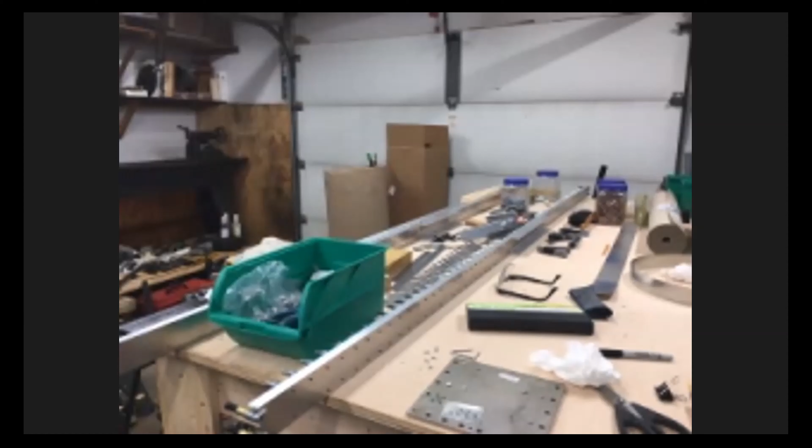But I was just kind of curious, how many of you guys have any of those pneumatic riveters, be it Harbor Freight or another company, and what's your experience been with them? You're talking about for pulling rivets? Yeah, for pulling. That red one in the lower left-hand corner. Yep. I'd have to look and see what brand mine is. I don't even remember. I bought it through Zenith.

If you don't mind asking, what was the price through Zenith? I was just going to go look. I don't remember. It was probably 10, 12 years ago when I was working on a 750. Well, it was probably half the price of what it is today then. Yeah. On Amazon they have a variety. There was one there for about $75 with 2,600 pound pull, it said. The recommendations on it, 5 stars or 4 stars, were pretty good.

Okay, so what is the go-to size or force needed? I've never done one of these. I don't know what the force is. That's a really good question, Alan. I guess I'm not sure what's required. So I use just a Harbor Freight one. I think the list price is like $40. You get your 20% off coupon and get it for $30 or something. Got like 2 of them on his bench.

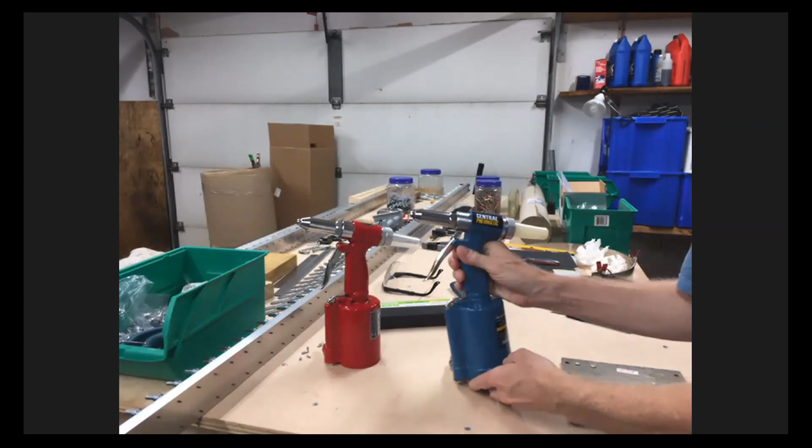I guess I haven't looked at the pressure. I know there's some adjustments you can make. With the actual air pressure, you can reduce it to get a different pull. And there's some other mechanical adjustments you can make. You can use a different size tip on it to get different effects. What I've looked at is the size on the back side of the pulled rivet where it expands, to make sure it's sufficient to hold.

Hey, Martin, have you used the rivets that are the recessed rivets that fold over? Are you talking about Zenith? Yeah, they use a conventional countersunk rivet. And then they have the concave tip that rolls over the edges of the countersunk to make it look kind of like a domed rivet, so it gives you a little more of a gripping or pinching. Compresses the 2 sheets together tighter.

Well, the head is also a little flatter, is it not? Yeah, not as much dome. It's supposed to be a little bit flatter than a conventional dome surface rivet. I just posted the link to that Zenith riveter in the chat. I believe the heads, instead of being flat, have a little bit of a convex dome to them, right? When they're pulled, they have the dome. Right. But it's a recessed rivet that they use.

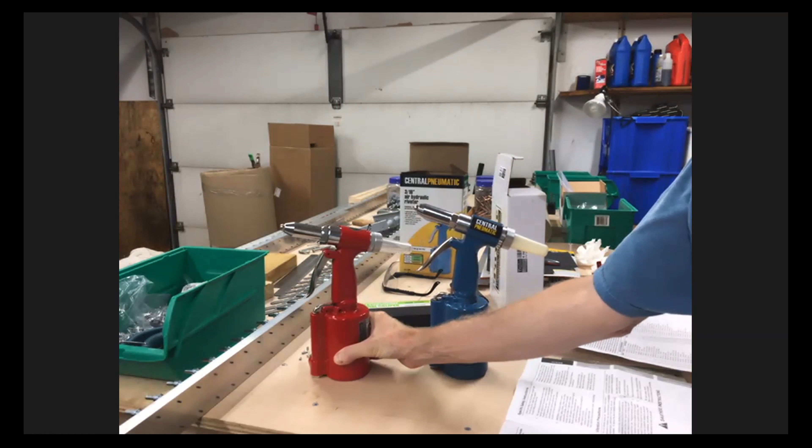Right. They start out with a flush countersunk rivet that you'd normally dimple the skin for, but instead of dimpling, you just use a normal rivet, and when you squeeze it, the tip on the rivet gun has a concave end, so it forms that flat countersunk head down to look like a low profile dome head. Interesting.

I didn't get to use it much on mine, but I helped them build the 1 Week Wonder, and 2 sets of wings at Oshkosh. So I pulled a lot of rivets on 3 different sets of wings in 2 years. Martin, so the idea is you've got something flatter than a conventional dome without having to go to dimples? Is that the concept? Yeah.

I never measured it to see the exact dimension. At the speeds the CHs fly, I don't think it's a real big deal whether it's flush or not. Van used to say that on the RVs, unless you're over 150 miles an hour, don't worry about countersinking. But some guys just like it because it looks nicer. It's a lot of work.

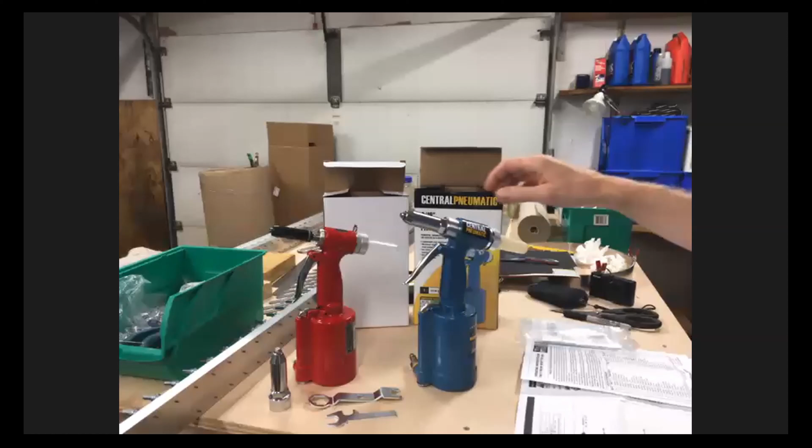Anyways, Greg, you got those two pullers there. Can you show us what the difference is between them? Basically the one is Central Pneumatic, so that's Harbor Freight, a $30, $40 tool. Yep, right there. And then the red one is Aircraft Tool Supply? It is Aircraft Tool Supply. It's branded Taylor Pneumatic Tool Company. And this is the one that Dave Thatcher has on the recommended tool list, and it's made in the USA.

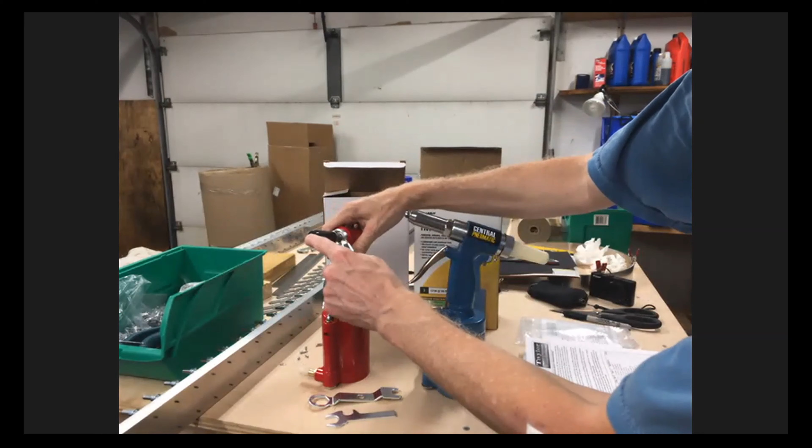And the basic gist of the difference, I would say, is, for example, I've removed this nose piece off this one. Both of them in the instructions will say always disconnect tool from air source before disassembling. That's just a given. With this, it comes off nice and it works fine. All of these surfaces are almost like nicely polished, finished surfaces. On this one, I'm not going to take it off right now because I am going to mess it up. When you turn the Harbor Freight one, it comes off with significant friction. This just comes off spring-loaded but with smoothness to it.

What I found happening was where you gauge the pull length, and it's very specific in the manual, it says 71 millimeters, there's this gauge wrench for both of them. It's on the money. Now, with this one I would take it off, and this distance was out to here. And then I would readjust it and it would move. The only thing I can attribute it to is the finish of the parts inside of this one is more like a first pass cut and then assembled. I'm sure you could take Scotch-Brite to the internal parts and make it as good as this one. But this was driving me nuts.

I had to change the nose piece, and oh my goodness, that took serious oomph and friction and almost grinding on it. So the trick with the Harbor Freight one was actually hook it up to air, squeeze the trigger and hold it. So now it's pulling back and there's no pressure against these parts. Now change the nose, change this thing. And when it's off, you can let go of it and it comes back out. Then you can do the equivalent of this on this one and get it adjusted right.

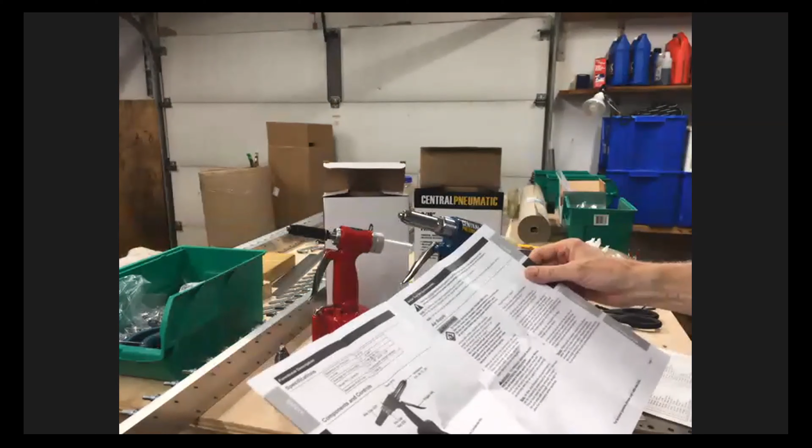But that was the gist of it. In the operating instructions, it's a little bit confusing about how you remove the bottom and the oil that you have to fill it with. In the Harbor Freight instructions, oh, and by the way, it says maximum pull force 2,800 pounds at 90 psi. And that's probably just a function of the area versus, you know, and pressure that's on it.

But it talks about, on this one, it says fill, you know, you remove this cap, you pull the piston out, and it says fill it to the top of housing 15, which is this part right here. In this one, it basically says a ½ inch below nut 40. Well, nut 40 comes in through here and attaches this part on. So that maybe cleared that up a little bit.

The instructions for this one were really specific about using a 30 weight non-detergent oil. And this just said hydraulic fluid. And so it kind of left it sort of up in the air. So that's the gist of the difference between the two.

$32 with a coupon, and good gravy. This thing was $165.95 with shipping. I paid $180 for that thing, which didn't feel right. But the second I used it for the first time, it was like, oh yes, this is awesome. So that's the gist of it.

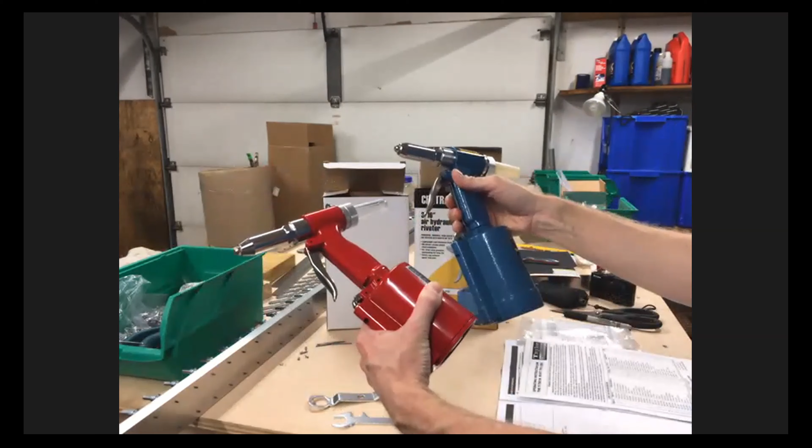Very cool. Well, there's a difference in size and weight also, isn't there? What's that? There's a difference in size and weight of those two units. Actually, it's very similar. Yeah, I don't know. It's hard to discern a difference in weight.

And what's almost scary is the similarity between the two. You know, it's almost one of those situations where the parts all came down the same assembly line. These just got put together. These got shipped off to the US and got polished and put together. You know, the angle of the pull trigger is a little bit greater here than here.

So I mean, there's definitely a difference to the internal mechanism, but... Which one's more comfortable? Oh, this one is the beast. I mean, it's incredible. But you know, as far as holding it, it's really just not that much different. But the fit and finish of this thing is outrageous. And like I said, not that you couldn't take it all apart and do that with this.

One thing I was going to say, Greg, you might want to look at this. Yeah. I have a swivel fitting, pretty inexpensive, but man, does that make life easy. Hey, I was wondering about that because I did have one of those that I put on here. Okay, yeah. So I've had those as well. Those work great for some tools, like spray guns and stuff.

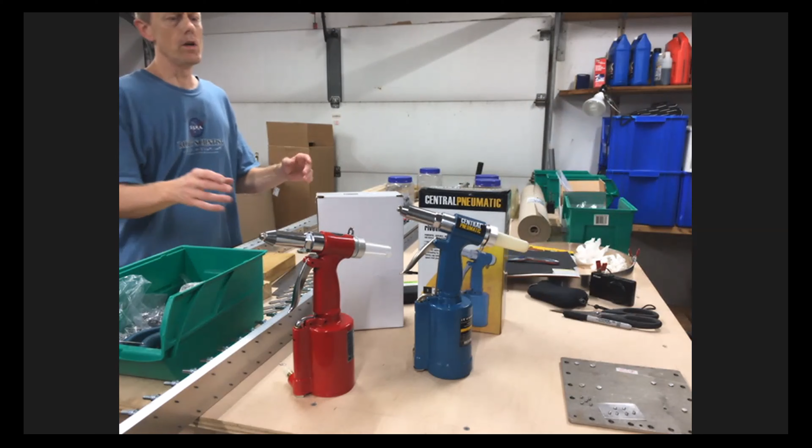That brings up an interesting quick side issue. A few weeks ago we were talking about the countersunk rivet angle, the 100 versus the 120. And with the Zenith one, they're using a countersunk rivet and then with that head, they press it down, because of that shape of the head. So here we were talking about a 20-degree difference in countersink angle, and Zenith intentionally uses one that's 60 degrees off.

It just kind of reminded me of that conversation, the 120 versus 100 thing, which, I've got the cutters for both now, but it's really interesting how they're using something that's 60 degrees off and then forming it. And here we were talking about a difference of 20 degrees. It's just kind of interesting. Zenith AVEX is using the 120-degree rivet.

Right, and so that's what Greg's saying. On each side, it would be 60 degrees from flat, right? No, it's 30 degrees. It's 120 included. Oh, is it 120? Okay, I guess that makes sense. Yeah, you're right, 30 on each side. You're going from 180 to 120, so it's a 60-degree difference. Depends where you measure the angle. Yeah, or a 5-degree difference, or 10, whatever. Right.

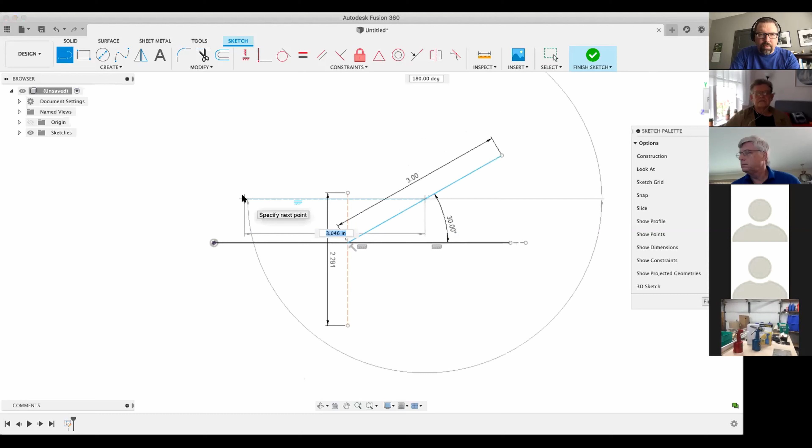So what we're talking about would be, let's just put up. So this is your surface. Let me blow away that dimension, and we are putting a rivet through it at a 90-degree angle. So this would be in theory the center line of our rivet, right? So from that point, there'd be a 30-degree angle there. Now let's just pick this up and pull it across. I'm not making this too scientific, but

in theory, if this is the head of your countersunk rivet, this would be a 120-degree rivet, right, Martin? Correct. So this line is 180 degrees from the center point, and this would be 30 degrees off of 180, which would give us 150 degrees, and then the other half would be up another. Pulling this the wrong way. Just mirror it. Yep. I guess I could have just mirrored it, but basically, if we dimension this angle, you're now at 120. We'll just over constrain that. Does that make sense? Yeah.

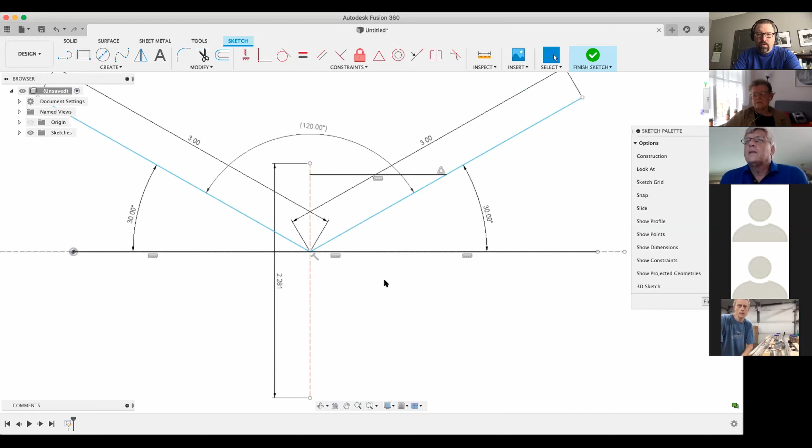Versus if we do this to this, well, I guess I can't even dimension a single line. So the thing we were talking about a couple weeks ago was how the rivets that are called out are 120-degree rivets, but the hole is 100-degree. Do I have that backwards? Maybe. Yeah, an AD rivet countersunk is different than what your pulled rivet head is. So if you use a dimple die that's set up for a normal MS or AD solid rivet, it's not the same angle. Right.

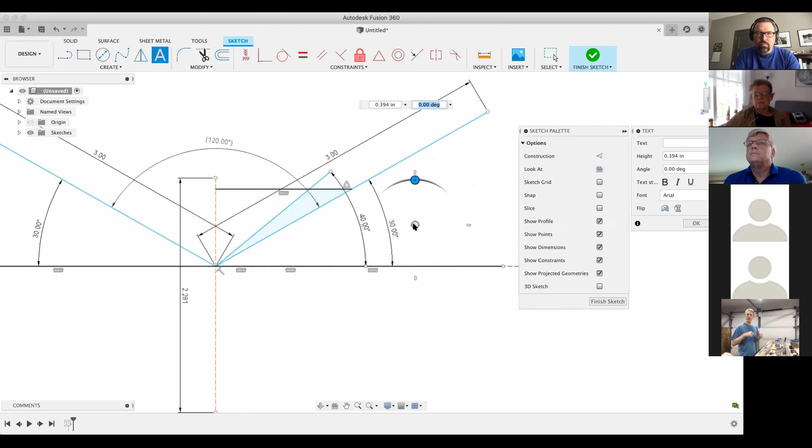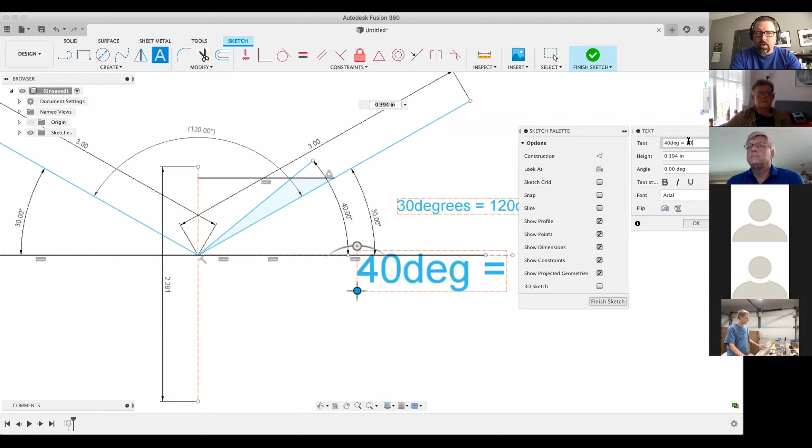So the cutter that comes with the standard countersink was 100 degrees instead of the 120 degrees of the countersink of the pull rivets. That was the initial thing that I had asked about. You got to get a 120-degree countersink to use them. Yeah, so then we have the example of the Zenith rivet that is intentionally way further off than that, and they just mush it down and make it work. And here we're worried about this little angle. It was just such an inconsistency. That was the only observation. Right. And then the thought here being 40 degree equals 100 degree rivet, right? Or 100 degree hole, I guess, as the case may be.

So the thought was that if you're dimpling with a 120 degree dimple die, but you're putting a 100 degree rivet in there, is your head going to be wide enough because of the angle there and that sort of thing? Right. Or if it's reversed, of course, then maybe your head's too wide and it will actually not be flush. And then the most important part is simply, what... Go ahead, Mark.

Most guys end up doing is they inadvertently use the 100-degree dimpler dies and stuff for their skins, and then they put a 120-degree pulled rivet in there. So then the head of the rivet is actually touching on the perimeter of the hole. It would overlap right in this area, right? Yeah, it's not seating down in. Bottom line, they're not compatible. Correct. You're not getting the same contact that you would normally get.

So if you really want to countersink and have a nice smooth surface and pull rivets, get the 120-degree dimple dies. Or at least make sure that the rivets you're using match the dimple that you're using, right? That's what we need to watch for. So the reason this came up was, Greg, you were looking at the builder's manual, and you found that the tool list listed the 100-degree dimple but 120-degree rivet, or vice versa. And so there's some confusion around that.

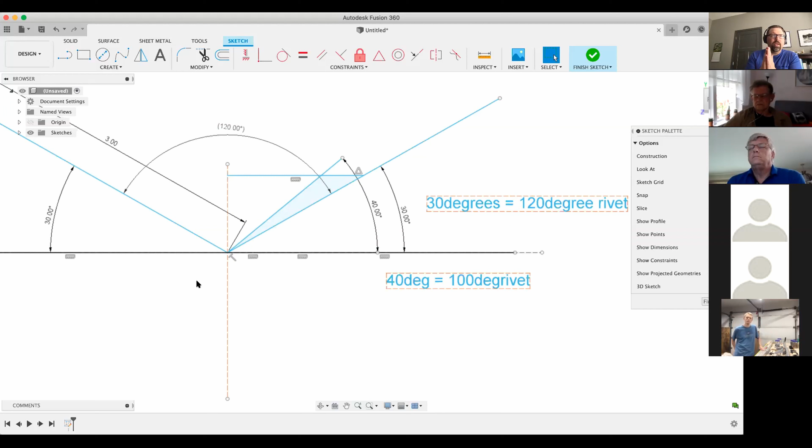Well, the only place that I'm aware of that the flush rivets are used on the Thatchers is in the tail area. There's a bulkhead where the vertical stabilizer attaches, right? So there's some uprights. So there's rivets on both sides, and if you have a rivet that's sticking out, those two surfaces aren't going to sit flush. They're going to be separated by however high the rivet head is.

Yeah, and you'll see some comments out there about the pulled flush rivets not truly being flush. So that's where I was thinking we were pulling a Zenith with putting this rivet into that countersink to reform that head, to make sure that bulkhead would fit up flat. That was just a question. I do have now both 100 degree and 120 degree countersink cutters and pull rivet dimple dies, so I can put whatever angle wherever. But that initial question was still there.

Gotcha. I'm going to pull up that spot on the plans in a sec. Solid rivets eliminate the problem. There you go. I use them wherever I can, just because it's me. That's all right, you can do what you want. It's experimental, right? I might save a whole half a pound by the time the plane's done.

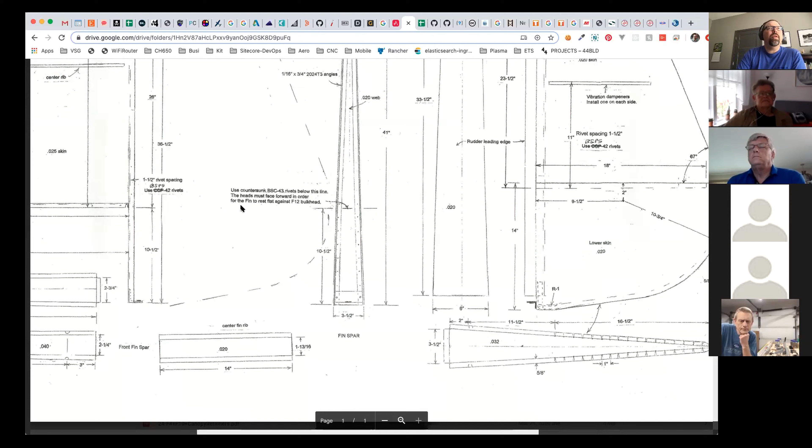Let me share this here. So this is the piece here. Use countersunk BSC 43 rivets below this line. The heads must face forward in order for the fin to rest flat against F12 bulkhead. So this piece is this right here. Let me scroll up and zoom out a little so we can see what we're looking at. So this is the vertical stabilizer spar.

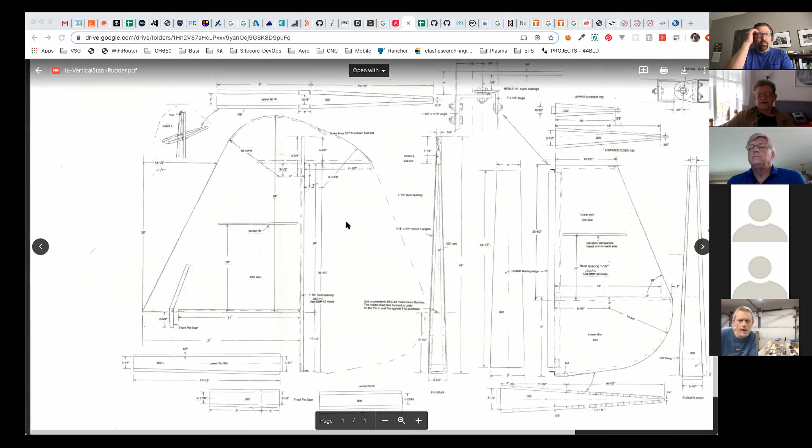I'm still seeing your rivet drawing. Oh, do a refresh. It should be the blueprint. You got it? Yes. Okay. So anyways, that's the piece we're talking about.

When you mount this up, it needs to mount directly to that F12 bulkhead in the tail section. Let's go look at that quick. So this would be this bulkhead right here, which is actually marked as F11. I'm guessing the F12 numbering is probably from the CX5, not the 7. I'm looking at 7 plans. Let's go to the 5 and double check that that's correct.

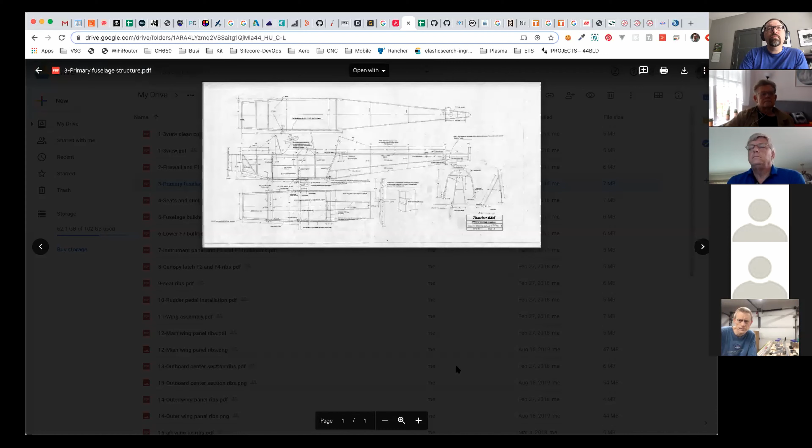Wait for this to refresh. Yeah, so this is marked as the F12 on the CX5 plans. So on the CX7, it's the F11. So it's a change. Ellen, you asked about what changes for the CX7. That's one of them.

I don't think that was me. What's that? Oh, wasn't it? Oh no, I'm sorry. That was another builder asking. I think Don Larson was asking about that. So, yeah, Don's building a 7. What's that? Don's building a 7. Yep, exactly. Okay.

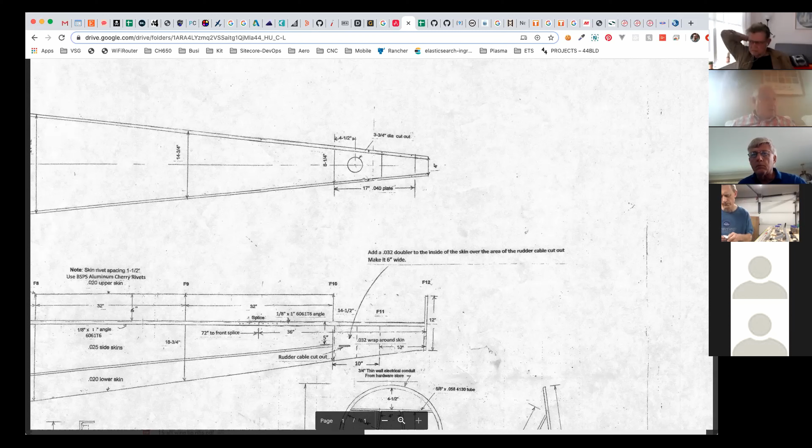Bulkhead. This is ironic because I've actually been closer to a CX7 than anyone else online because I sat in the prototype. Yeah, there's a few. Greg, didn't you go down and sit in that one? Yeah, we went down in November. Oh, okay. And then I think Jeff up in Minnesota, I can't think of his last name right now. Yeah, Jeff. There's proof of him sitting in it, there's photos online. I don't have proof. No dated photographs. There you go. But a couple of people have been down and checked it out. I personally have not, I just decided to build one. But cool. So, anyways, that's that bit.

Let's see. I'm gonna stop my share and go dig up that YouTube video of the CX4 crash that we had. Thank goodness everything's good there, but can someone summarize the circumstances? Actually, let me read this to you, and I'll put the link in the chat as well. This seems to be the most up to date and has a quote from the pilot. I'll just read the beginning of it.

It was a harrowing plane crash captured on video, and now the pilot who survived it recalls the frightening ordeal. David Reeser spoke to Eyewitness News about the moment the small plane he was piloting crashed while attempting to land at an airport in Upland Wednesday afternoon. Reeser faced two major problems. The propeller of the plane flew off, and oil suddenly covered his windshield, forcing him to fly blind. Quote, it was a real surprise when the propeller went off. It came off the airplane, but I didn't have a sudden fear, he said. I've always practiced off-field landings or dead stick landings. Now I get to do one. Quote, Mayday, Mayday, I just lost my propeller. There's oil all over the screen, end quote, Reeser says in released audio tapes.

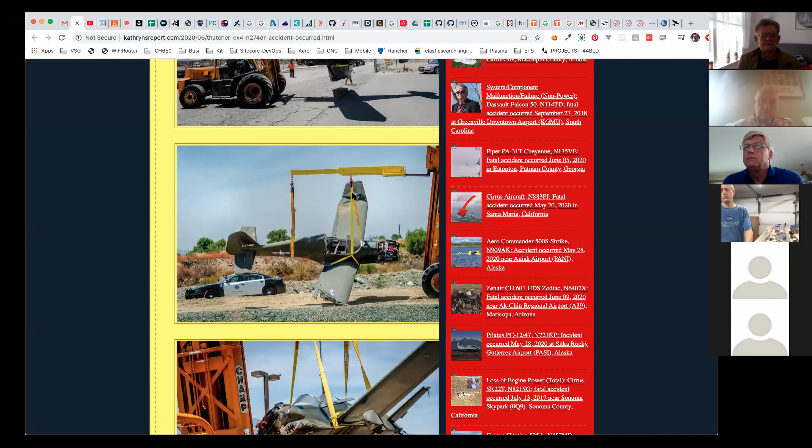So what I'm inferring from this is, if you were to hit severe turbulence or some in-flight issue, it looks like the wings aren't going to be the problem area of the airframe, right? Like you aren't going to lose a wingtip in flight probably. That is a pretty rough crash, it looked like. So definitely stressed the airframe in ways that it wasn't intended to be stressed. Hey, Ben. Look at the speed brake on the bottom. Let's see. Yep, it's there. It looks a little twisted there.

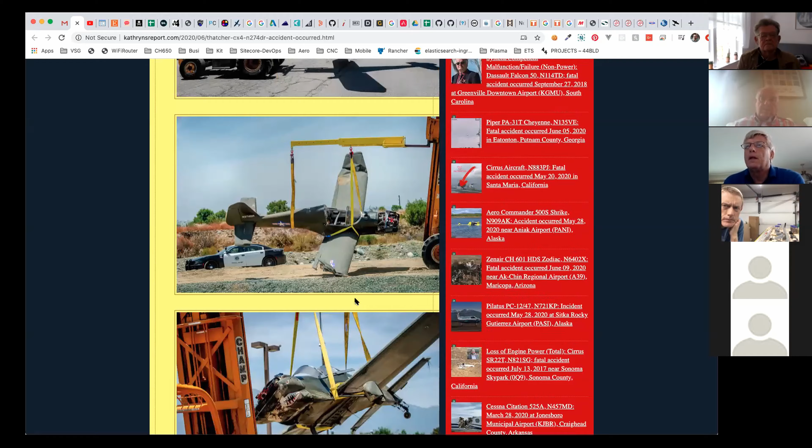Ben, if you get a chance, go to your email. You got a picture of both twins. All right. Let's see here. A picture of both what? It's called both twins. The two planes are identical. They built them together. Oh, okay. All right. Let me see what I can come up with here.

Because other than RevMaster and Scott, nobody else is actually building engines. Sonex and Great Plains are just kits now. Right. Most of them are not 2400s, are they? No. I don't even know if Great Plains even offers a 2400 anymore. In the documentation, it stated that it was a VW 2400. Right. The FAA documentation.

But yeah, Martin, to your point on the engine build, I think you're right. I don't think there's another VW-based builder. Nothing that I can think of anyways. Because there's AeroVee, which is the Sonex. There's Great Plains, but both of those are kits, right? Yep. Correct. And then the Revmaster and the Casler, you buy it complete. I think that's it for the VW base.

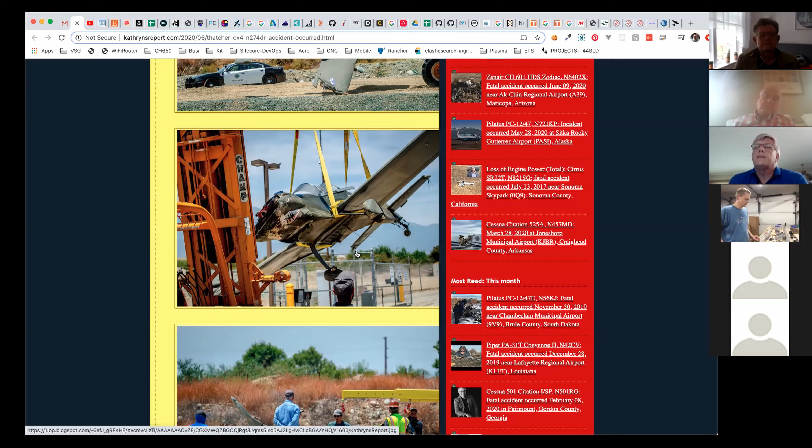Yeah, I can't tell though on this if the speed brake was down, or even if it was down, based on all the inertia that was put into it, if it might have been popped up. It looks kind of twisted in this photo, but it definitely looks up there. Looks like the landing gear's twisted too. Yeah, this one's pretty bad.

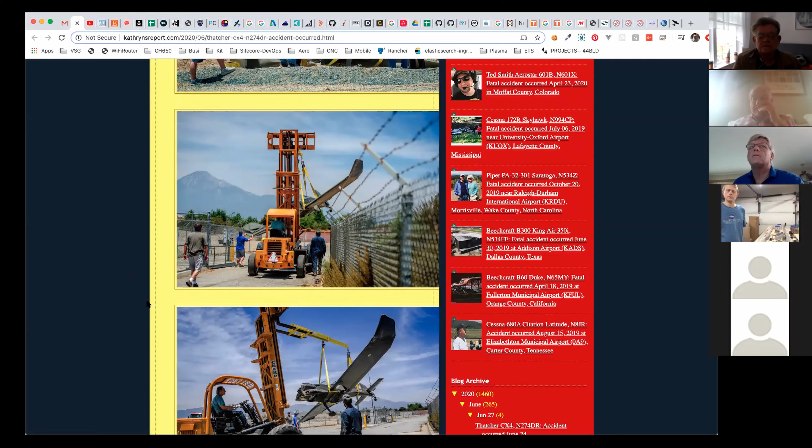I guess the things I think about are like the cockpit area isn't collapsed or compressed, which means that there's a good amount of strength in there. I think the design's good to protect the pilot in the case of something like this. I don't know, makes me feel pretty good about the design there. I'd be more worried about what happened to the fuel when I was sitting in the cockpit and couldn't get out.

That's a good point. So something did change with the geometry of it because he wasn't able to get out, right? So was that due to injury or is that due to something having moved? Yeah, it'd be interesting to find out if the plane just ended up in an attitude that it was hard to get out.

Because we had a guy 20 years ago landed a Yankee in a tree, and he sat in a tree all night because he figured if he got out of the airplane, he was probably going to hurt himself more than if he just sat in the tree. And finally they rescued him. So sometimes you get hurt more after the crash than during the crash. Yeah. At least in the tree, you'd be able to use a cell phone. Yeah.

Are you on the ground? No, but almost. I'll be there eventually.

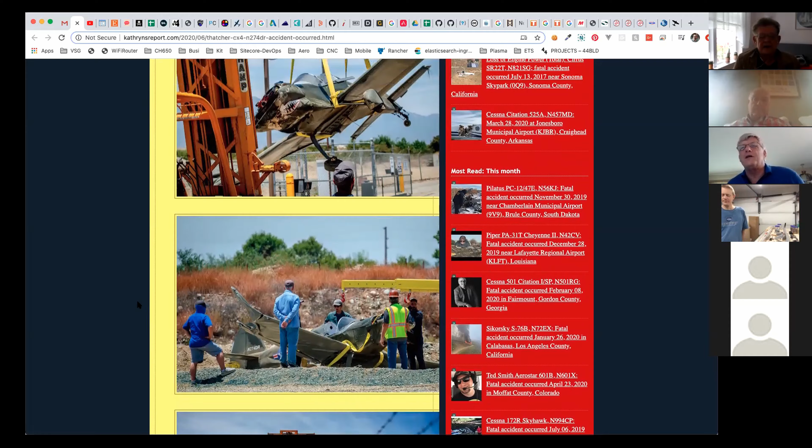Well, luckily the tree was beside a highway, and somebody driving by the next morning saw him up in the tree. Wow. But that's what you get when you scud run at night in the wintertime. Anyways, kind of an interesting topic there.

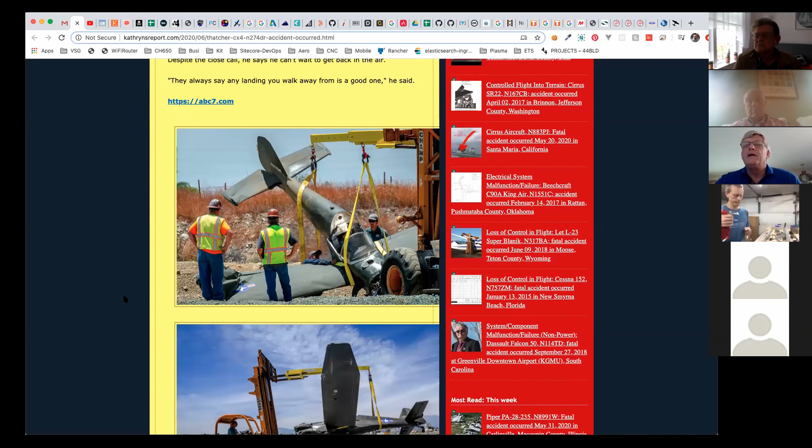With more information, it'd be interesting. As Glenn keeps saying, the planes have like a 13:1 glide ratio; well, without the prop, it should have been even a better glide ratio. So how high and how far from the airport did it happen? And I know Glenn asked, was this on takeoff? That's the question too. Like, how long is the runway? If he was on takeoff roll and he got up a couple hundred feet and then lost the prop, that would make sense that he'd already have used up half or 3/4 of the runway. Something on climb out.

Yeah, I don't know anything about the Upland airport there. I mean, the only thing I could think of is, how much can you side slip it? Because he had a visibility problem, so you might end up with a face full of oil if you side slipped it too much, I suppose.

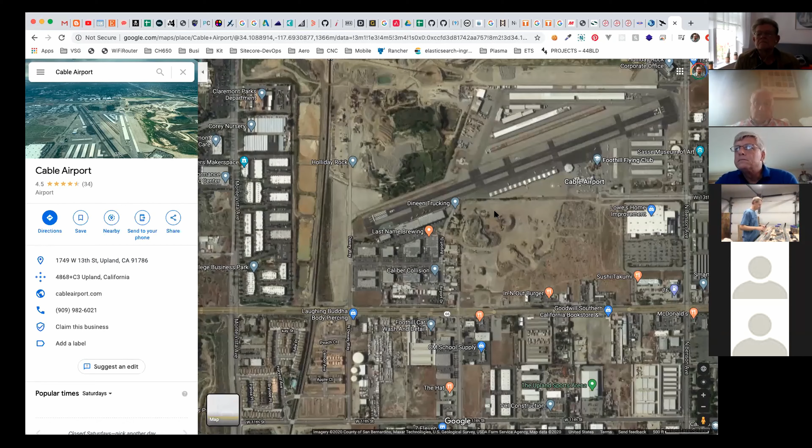So I believe the photo I saw showed that he was going this direction and ended up somewhere down here, like where it says College Business Park. So he was kind of going to the south. I don't know if he was taking off or landing or what he was doing, but he was heading towards the southwest, and the initial attempt at landing was somewhere in here, I think, and then he ended up passing this

road here, Dewey Way, and then landing somewhere here. This must be that berm. Oh, there's a channel down here, and then a business park. Yeah. So that must have been what he was trying to avoid there.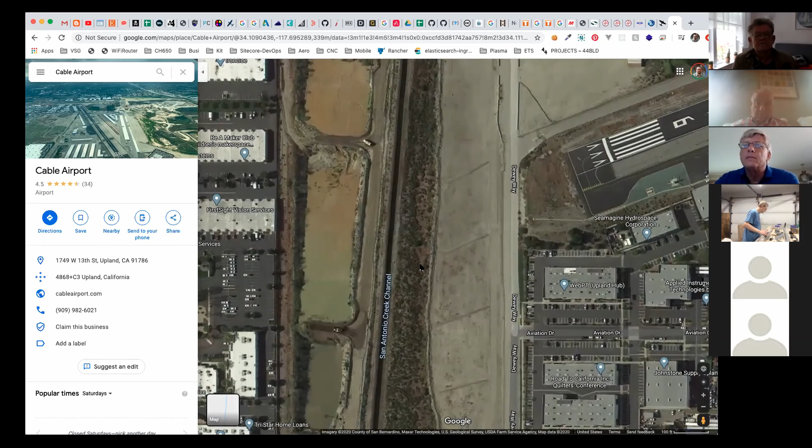But that water, are those ponds? It kind of looks like it. Now, whether they have water in them year round or not, I don't know. Maybe dry ponds. Yeah, they do look like ponds though, and it does say San Antonio Creek Channel, so that would maybe be a dry riverbed or something, but seasonal moisture in there, I don't know. But anyways, that's what I saw.

Not to say it wasn't over this way or something, but there was a diagram showing the point where the plane came to rest was down here, is what I saw. So it seems to kind of jive with what we saw in the video.

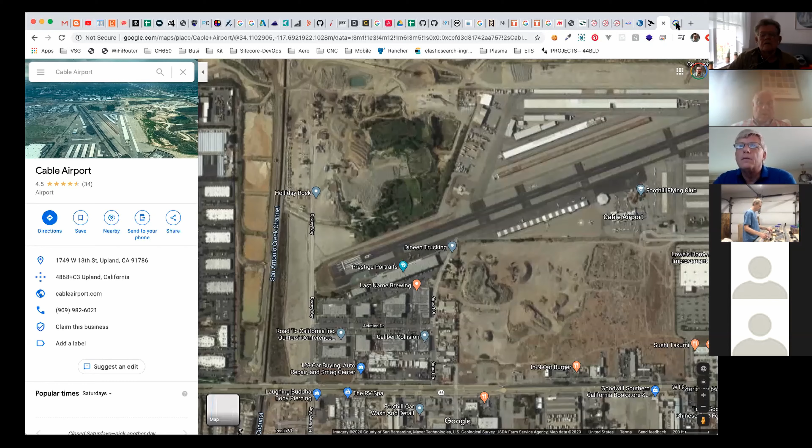But is that a towered airport or not? I didn't look. Looks like the tower, I do not know, just north of the Dineen Trucking. It's not a very big airport, but they might have enough volume to have a tower. Let's see. Okay. Do we have any AWOS?

Fuel pricing. Hello? Hello. Hello? Harold, you're on. I'm sorry. Somebody's trying to call through. Oh, okay, no worries.

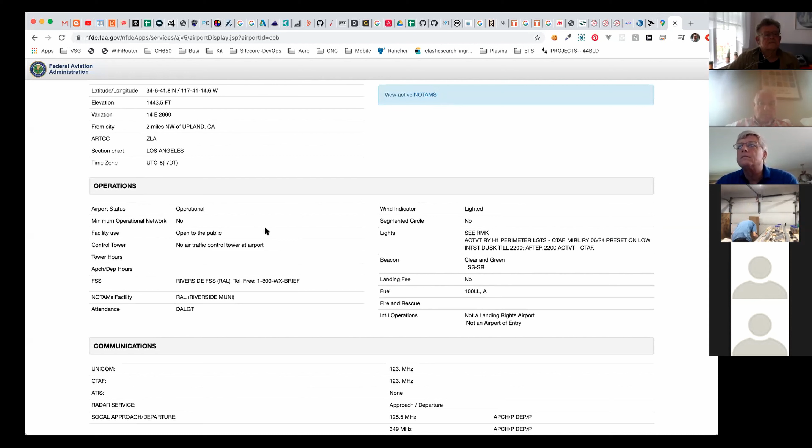So what else? What else are you guys up to? Alan's getting ready to start building, and there's a couple other people that are starting CX4s and other things. Anyone have any new projects they're working on? Greg, what's your status? I saw some riveted together aluminum there, so.

Yeah, there's one other thing I wanted to mention. A couple places, probably in all the CX plans, you end up with 3/4 angle that you need to rivet into. And boy, can you see the little mark on the end of this thing right there? Yeah. Okay, that's essentially how close you can get with a rivet head down on that. And it's kind of silly close to the edge of the angle where you'd normally want to be riveting further in.

So I ended up making a little block out of aluminum actually, and shaping that so that you can now get that rivet head on there and be doing a little more justice to exactly where you want to be riveting it. So this little block that I made was a real saver in that regard, because it made possible what really didn't look like it was possible. So that was the only little tidbit.

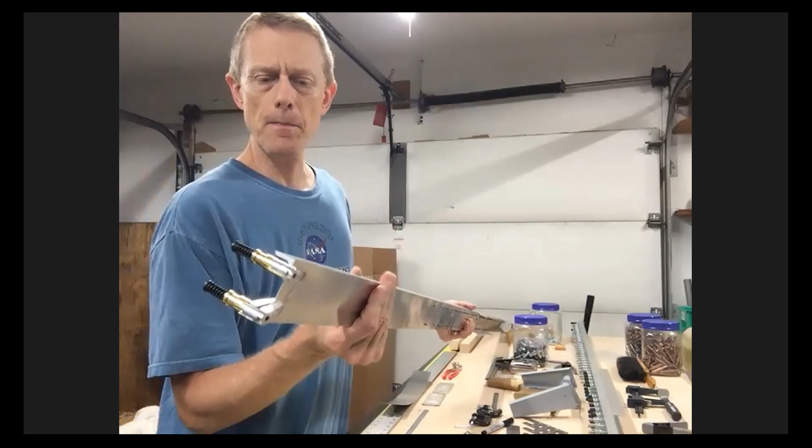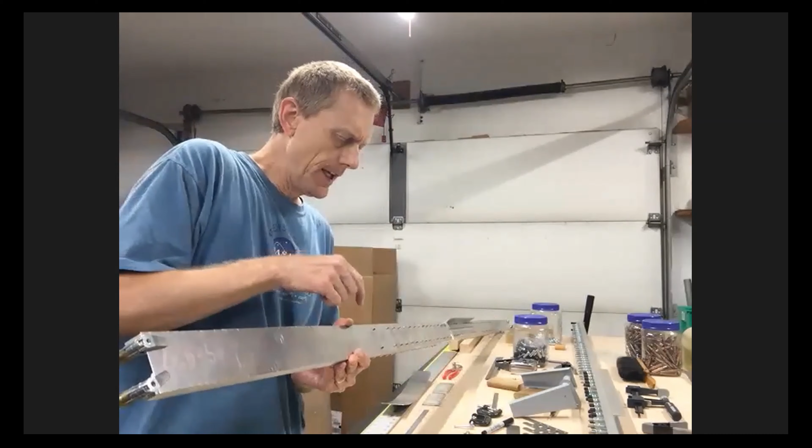So in the construction manual, you see photos of these horizontal stabilizer spars with the full height aluminum and the pulled part of the rivet on this thinner back side, which of course, yes, it's preferred supposedly to put the rivet head against the thinner material. So in theory, you'd be going back the other way. Right.

Now, when you do this with the 3/4 angle, if you have the spar web inside of it, now this is 2 1/4, so it's out of proportion, but you end up with a significantly smaller piece of material going in on the inside. And so I chose, because of the thicker angle, to mimic the photos that were in the construction manual, and in lieu of trimming it down a good bit more to fit on the inside, to put it like they have in the photos on the back side, if my little quick visualization made sense.

What is the reason that you're riveting the other way? Right. What is the reason that you're pulling them from inside versus outside? That's what I'm missing. Because that's exactly the way the photos in the construction manual show it. I think it's wrong. I would agree. I mean, unless there's a specific reason, but that seems wrong to me. Well, when you put in S1 and the two S3s, there's a real question as to how you can access that area.

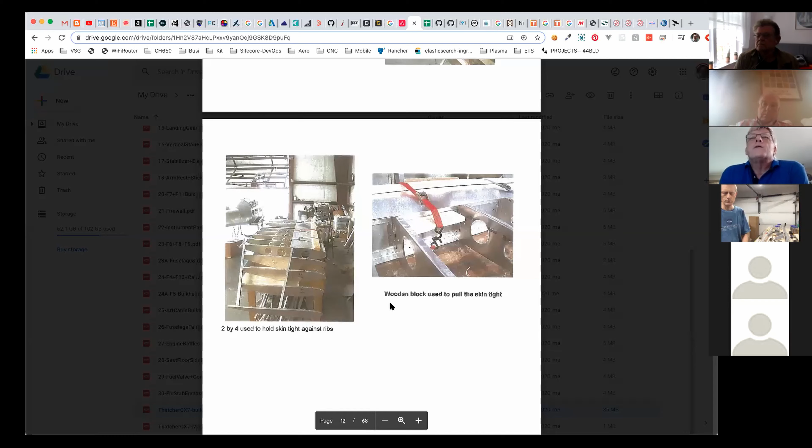Say, a quick question, Ben. I'm on your shared screen on like an internet page for the last 10 minutes, so I missed all that, and I cannot find any way to get off of it. Is there some way to? Oh, it's up above in green. It says you are viewing Ben's screen, but it's not what you guys have been talking about.

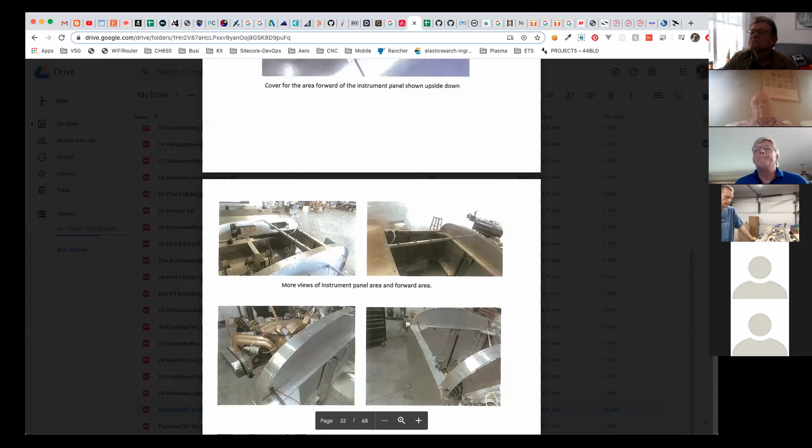Apologies. Yeah, I'm not sure. Other than if you disconnect your video or something, or let me try just stopping and resharing here again. Although I've done that a couple of times. And let's just see if that clears it all. Is that any better or still the same thing? Yeah, nothing. I'm not certain. Let's see. Trying to find the spot.

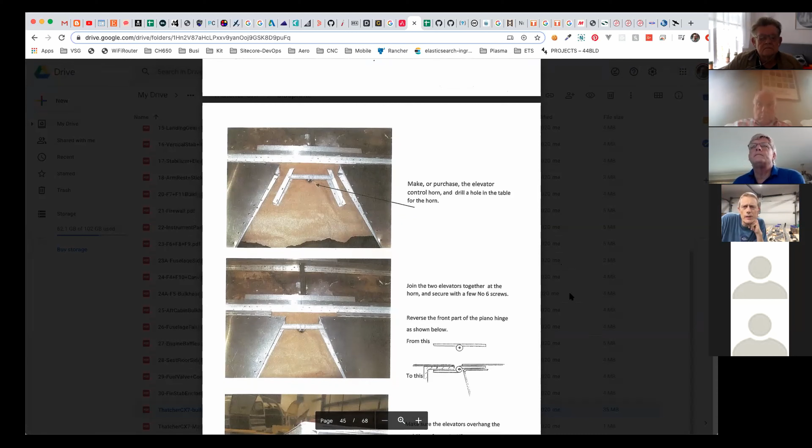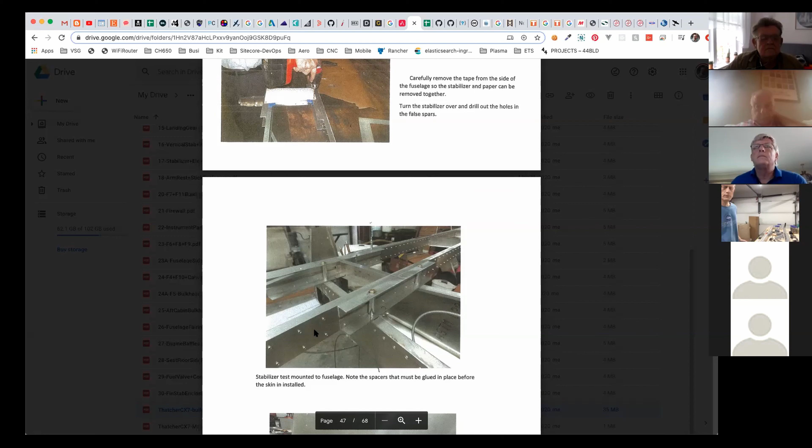Okay, so Greg, this is kind of the general area we're looking at. Is this what you're looking at here? Yeah, it's that, and then there's a couple other. Right there. Wow, yeah, that's weird, huh? That's exactly what I'm set up to do, exactly like it's shown in that photo. I mean, if there's not interference on the backside from some other joining component, I can't understand why you would do it that way. Is there a description of that? Yeah, here's another one. I can't tell if this is the formed head or not. Some you can't tell, admittedly.

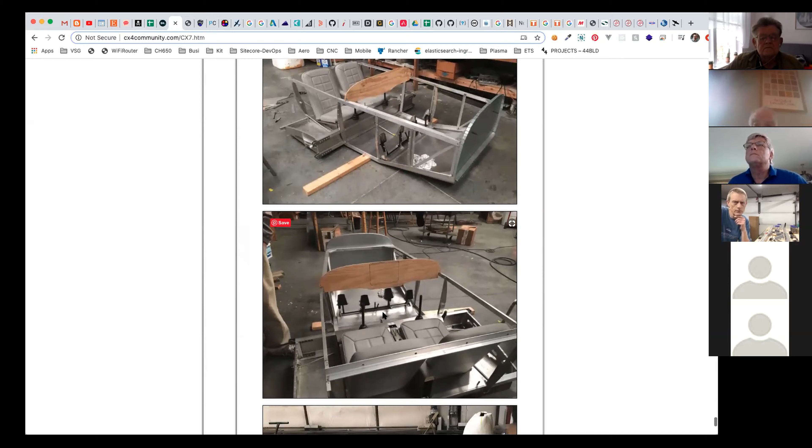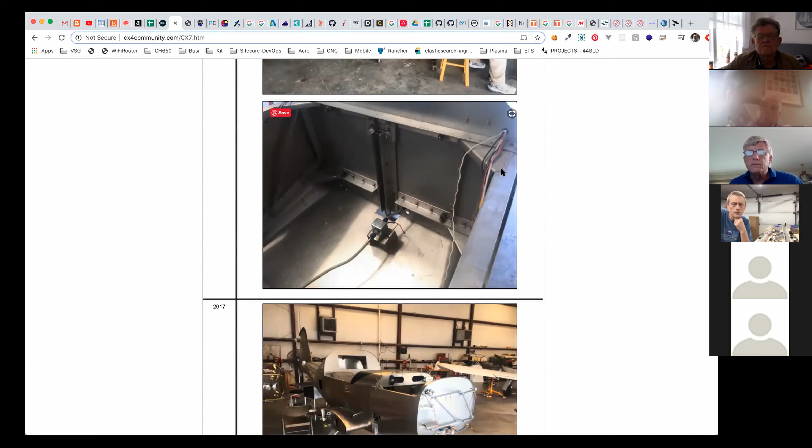Okay, I'm going to go over to this. So this is on the CX4 community site. These are photos I think Jeff took. Let's scan through and see if we can see any close-ups of the tail section. See, like here, this is what I would expect. These are those brace pieces, and they're riveted through the thinner 40 thousandths material into the 3/16ths piece. Same thing as the skins here and so on. Exactly. That's what you would expect. Yep.

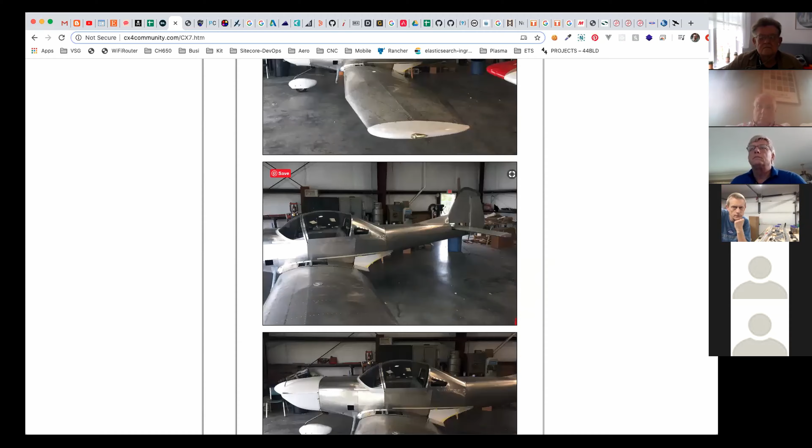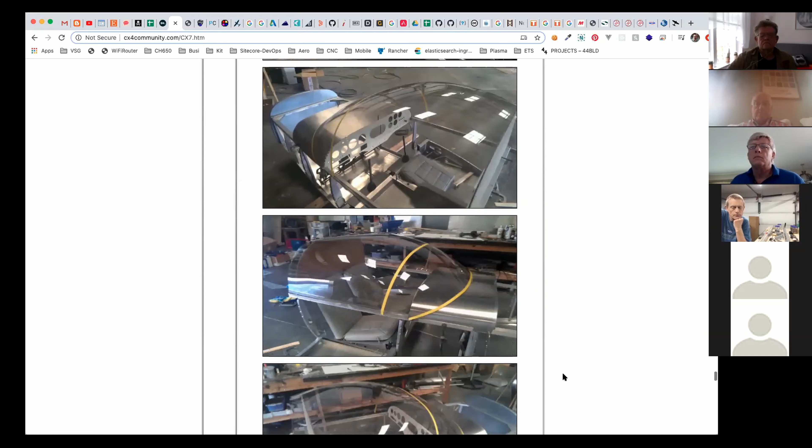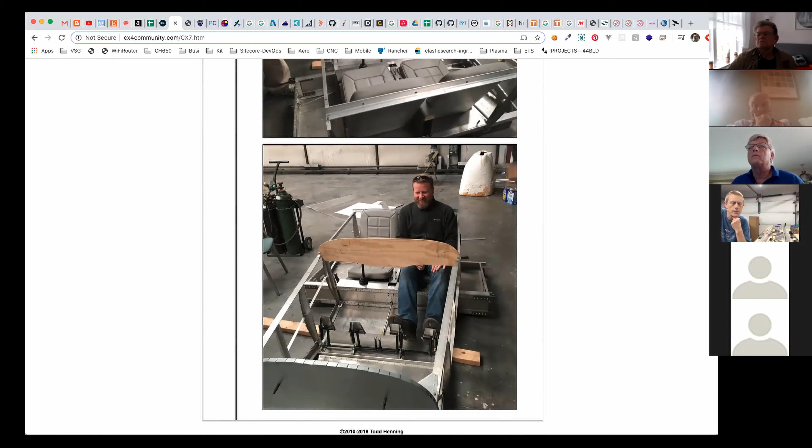And I would look long and hard, or talk to Dave for the reason that he did it that way, as shown in the builder's manual, before I would do it that way. It just seems contrary to everything I've ever seen about doing pulled rivets. Yeah, I'm honestly not seeing anything in here. You can keep scrolling down slowly, but I don't think there's much on the tail here. And you have some situations where the S1 and S3 ribs attach between the two horizontal stabilizer spars, and you've got thin material on both sides. So it's just whether the head goes on the thinner side, because they both are.

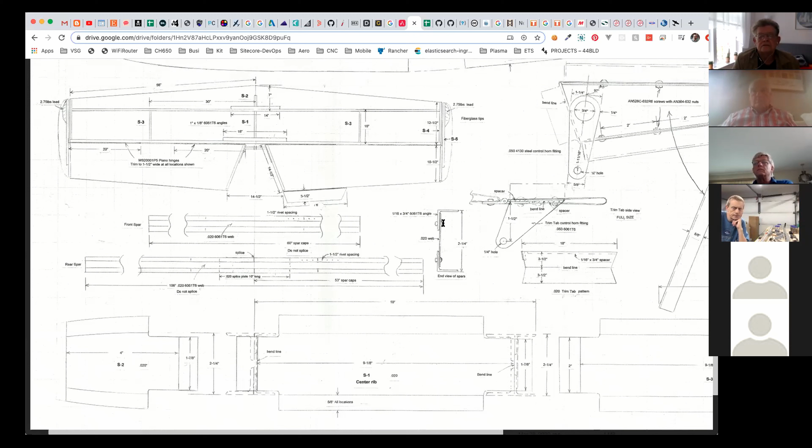So in this case, on the blueprint I have on the screen, the factory head would be external to the airplane. It would be inside, I mean, it wouldn't be in the airstream, but it would be pointing outdoors. Yeah, exactly. Looks to me that would be an ideal place to put a flush rivet and solid ANs. Solid, I would agree. I think flush wouldn't be necessary. It's not in the airstream, so it shouldn't have any effect on it either way. But yeah, the solid rivet, that would be totally fine there.

Question about the orientation of the piece. I'm thinking in terms of, did Dave build it the way he built it as if those rivets were bolts and you were running bolts from forward to aft? Or have I got that backwards? Well, it's shown in the blueprint here. Yeah, okay, so I see what you're saying, because with bolts you would always want the head of the bolt to be facing forward as much as possible in any structural components. Yeah, so I think in this case the factory head would be facing aft.

So the open end of, let's see if I'm getting this right. The open end of this faces, there's two angles. I can't see myself on the screen here, so I don't know if you guys can see my picture, but I think I have Greg's video pinned here. Why is the web built on the inside of those angles? I don't know. The only thought I would have would be that for some reason he wanted that splice plate on the backside to be flush on the angle, but I don't know why it would matter if it was on the web or not.

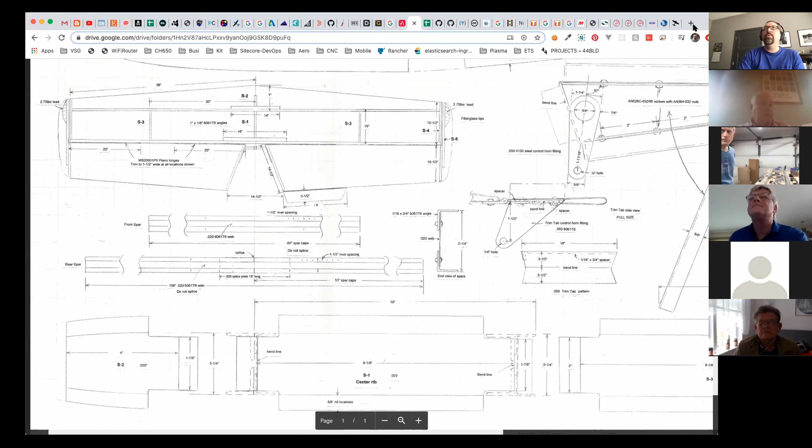Let's see, pull rivet. I'm trying to think. Is it 519? There's a spec on hole spacing, edge distance, that sort of thing. But I'm not sure if this is for pulled or not. Actually, what we're trying to do here is derive the reason after the fact, which is probably a waste of all of our time. Very true. Call Dave and solve that question.

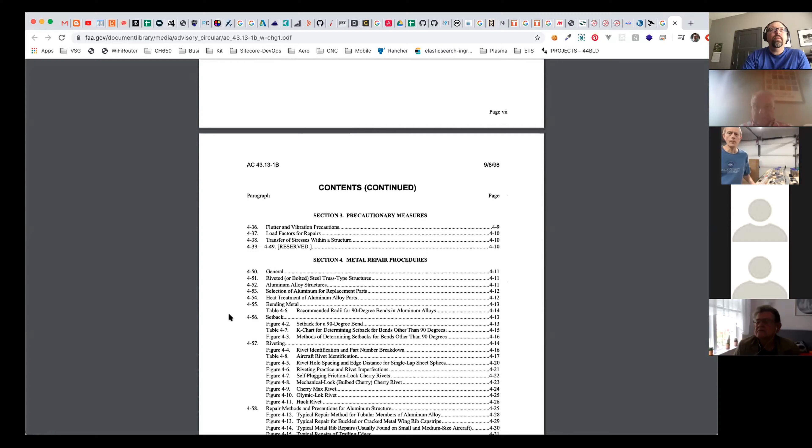Greg, are you going to reach out to Dave on that one? Yeah, I did touch base initially, but now at this point I need to clarify. But yeah, that's the plan. And honestly, I'm asking more than I'm telling. So Greg, after you have that conversation, would you post that in the groups? Absolutely. Thank you, sir.

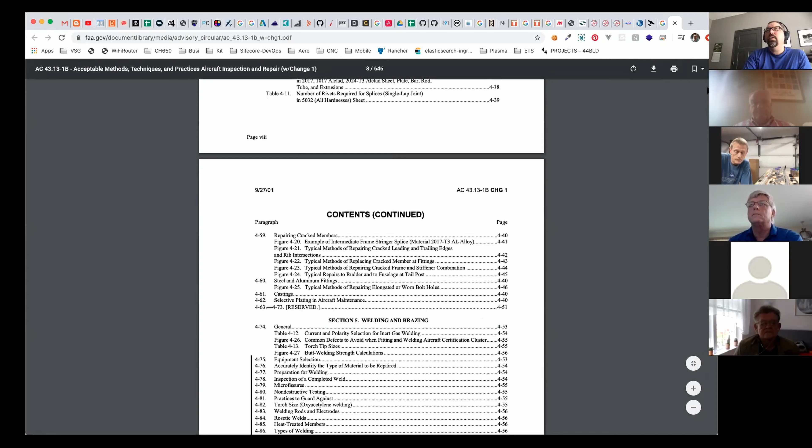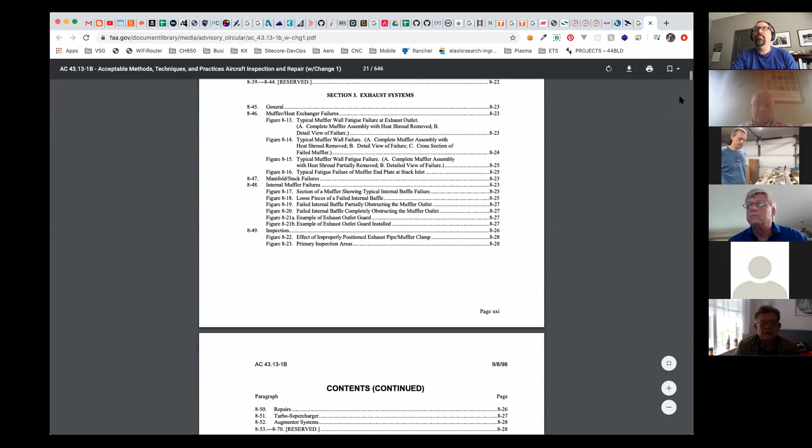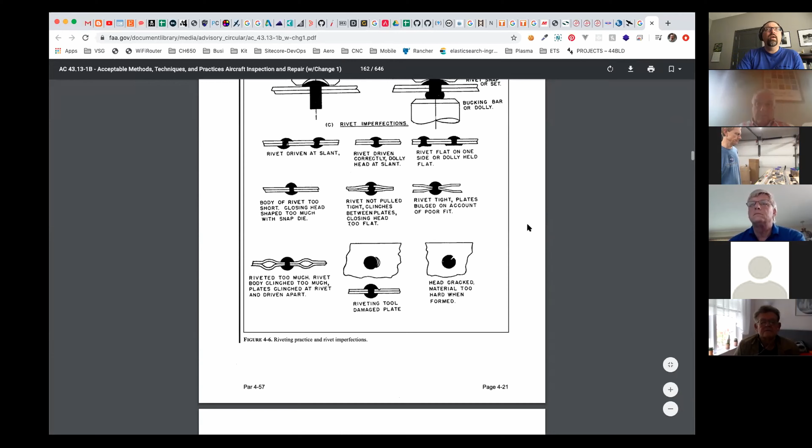So anyways, this is a good place to go. This isn't letting me scroll down for some reason, but here we go. Follow the Bible. This is a good place to go for details, 425 or something. There's 420, rivet identification. This talks about the diameter of the rivet, the spacing of holes. This is for hard rivets. Maybe that part doesn't. There you go.

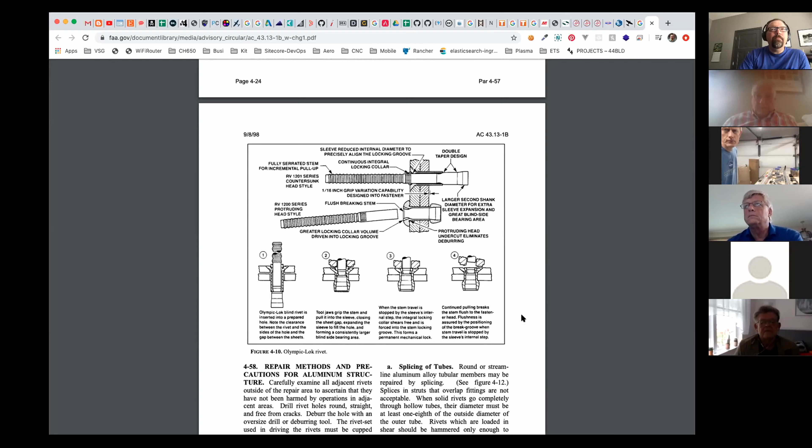Here it talks about Cherry Max rivets, self-plugging friction lock, bulb, Cherry rivets. This doesn't discuss orientation. Yeah, that's what I was going to see, if there was anything that talked about which way. No, this document doesn't.

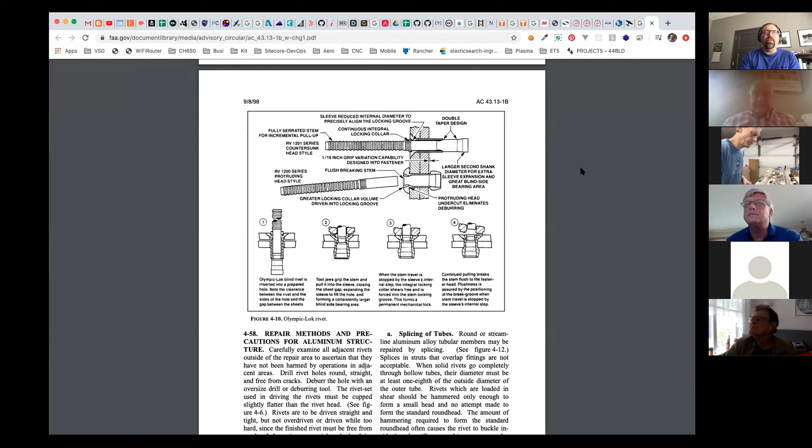There was a separate document that talked about orientation of fasteners. I can't remember which one it was offhand. Oh, sure. I guess what I was looking at was, well, I guess no. You're probably right, Alan. What I was specifically looking for is riveting different thickness material together, and which the orientation. Okay. So to your point, that might be in a different document. It seems like I had seen it in here before, but maybe not. There's a lot of pages and a lot of information, so it could be hidden in here somewhere. Anyways, but yeah, this is a good resource.

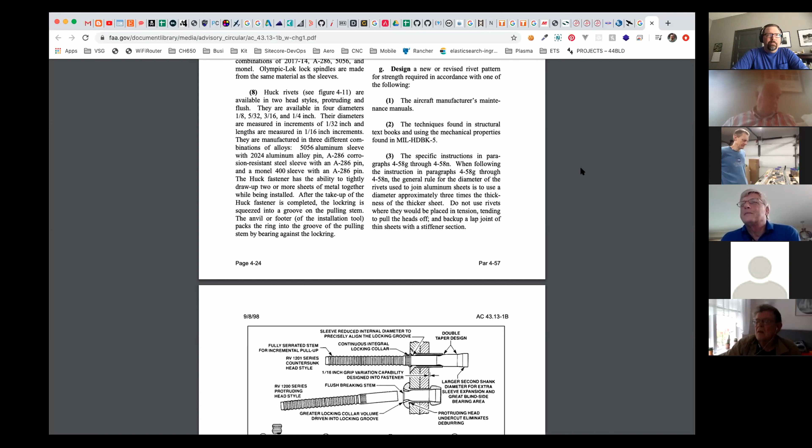It's great bedtime reading when you can't get to sleep. But when all else fails, consult Tony Bingelis. Yeah, right. That's actually a really good resource too. Yeah. Yep. But anyways, well, cool.

Anyone else have any other interesting thoughts, comments, questions? Any update on the CX7? Nothing since the last that we heard from Glenn. So sounds like the taxi testing went okay, and that's about all I've heard. I try not to pester him, so, but hopefully it'll be soon.

And my CX7, I've been working on redoing the center section spar. There were dimension issues we hit, and so I started machining that anyways. So hopefully I'll have that together before too terribly long. Are you redoing it in the virtual world or actually physically making a new one? Both, yeah. So I redid it in CAD, and now I'm machining it. I've cut the web and the two flat bars, and now I need to get out my jig for the angle and do that. But yeah, here I'll share my. I think I shared this last week, but I'll share this anyways.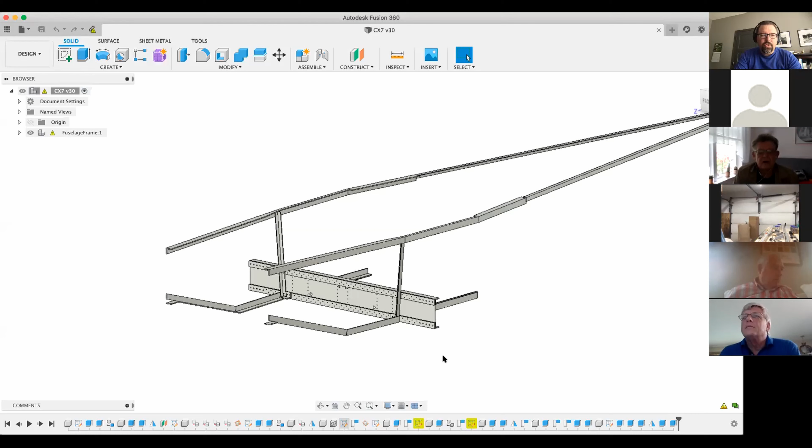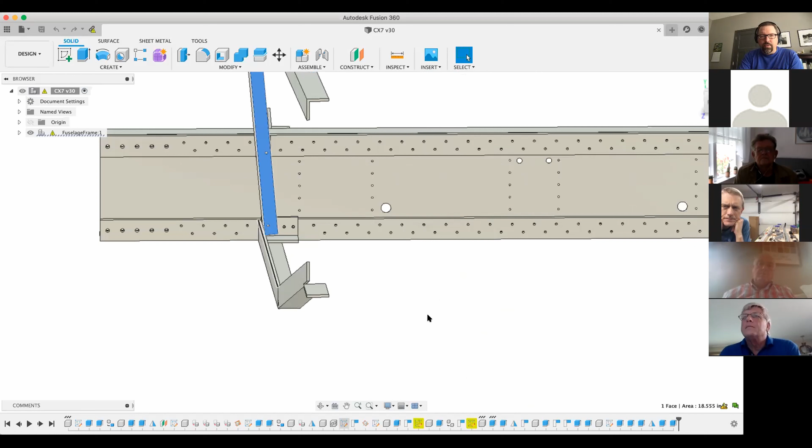The CAD model. Yeah. Where's your dimensioning incorrect? So on the original plans, there were a couple of things. If you look at the builder's manual, or the original plans, can you guys see my screen? I think I'm sharing. I'm looking at a rivet. Okay. Yes, sorry, Martin. So these vertical pieces, on the original plans, they're on the outside of the longerons. And so when I drew it up originally, these holes for mounting those were then flipped around to the back side. Then the other issue was from the center line to the outside edge of these lower and upper longerons, the dimensions were wrong. They were off like 1/2 inch in one case and 3/4 of an inch in another case.

There was one spec on the fuselage drawing and another spec on the center section spar drawing. I had somehow reasoned in my mind to go with one of them over the other, and I did it wrong. So I went back and moved a couple of things, re-drilled some holes. I figured I could put in just bolts in blank holes to keep the structure intact, no different than a rivet or something. But then I ended up having to redo it a second time, and that's when I realized I would have overlapping holes. That doesn't fly. So starting over. I think this is going to be good. I've looked it over with a few people to make sure the dimensions look correct. Anyways, that's kind of where that's at right now.

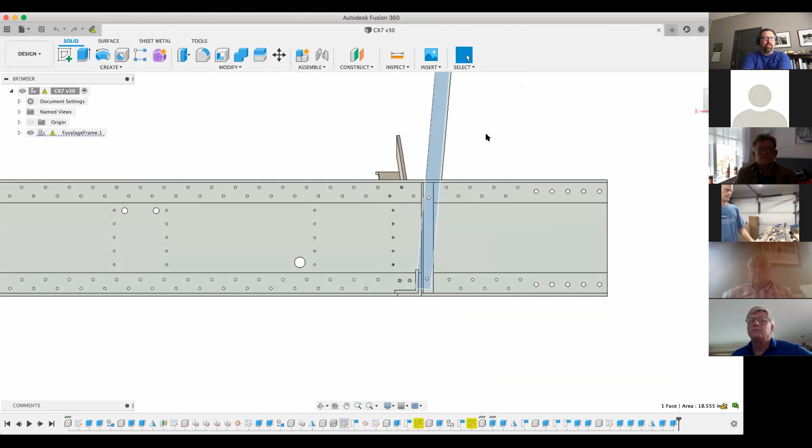Hopefully I'll have this together by end of this next week or something like that. And I already have a number of other parts for behind this cut and ready to go. So hopefully I can just bolt it together and continue on with the next section of bulkhead and the rear longerons. So it's been a process. But are you drilling the main bolts for the spars as a complete assembly? All 3 spars set and then drilling them, or drilling them individually and using a fixture? You're talking about all the rivet holes and bolt holes? When you get the outboard spars and the center spar done, before you drill the final holes. Oh, for the mounting bolts. Yeah, the 1/2 or 5/8 bolts, the main bolts.

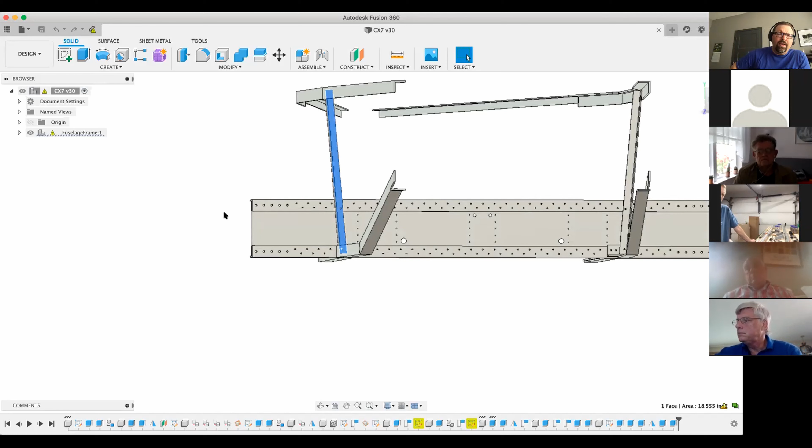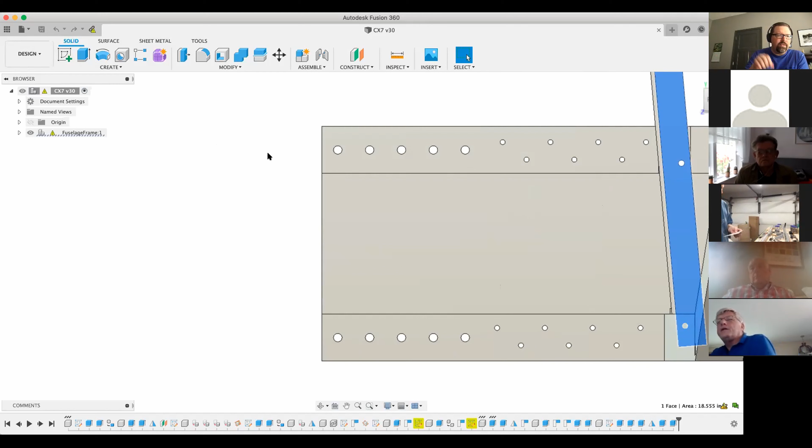You drill those at the very last. So what I'm doing is drilling with a letter F drill bit. I think F is 0.257 for the 1/4 inch bolts, the AN4s. So these holes here that the wing attach plates will mount to, I'm drilling those on my CNC machine on a flat surface. The actual wing attach bolt holes will be over here a little ways. Those I'm basically center drilling, but not drilling them to size. Yeah, they're off the end. They're not showing, but they'd be off to the left of those 1/4 inch bolts. Let me show you what I'm doing here. So here's a spar assembly for the CX5. This will take a sec to open.

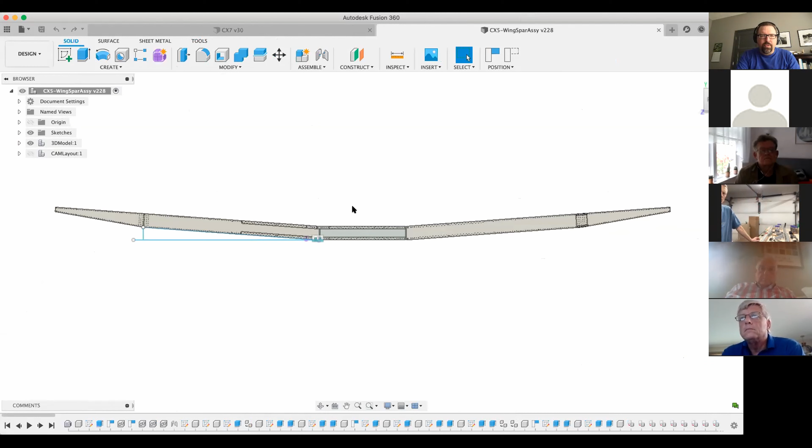So because I'm doing this in the computer, right, I can set all my dihedral and everything in here. So you can see here's the center. Basically, for any of you who aren't in the CAD world, I can mirror things. So this whole component like this, I think this would be the left wing.

Yeah, so this would be the right wing. So we're looking at the front. So anyways, this is your right wing, even though it's on the left-hand side. But this whole component I can mirror over here, so I'm not too worried about these locations here. But for the sake of this, you can see here's the wing attach plates, and the holes are marked in there. I'm not actually drilling them to size though, Martin.

I'm not. I think that's kind of what you're asking, right? So I'm not drilling them to size. I'm just drilling them to 1/4 inch, basically center drilling them, so that you can put a pin through them or a smaller size bolt and verify your alignment before actually final drilling those and bolting them. Okay. Does that make sense? Yeah, it's

I had one of the earlier RV-4 kits, and the 4 has just two wing panels, and then they butt together in the center of the fuselage, and then there's heavy steel straps that tie the two spars together. And Van thought he was doing everybody a favor by drilling undersized holes in those steel straps.

Okay. It was a real pain to line up a strap from the front and aft side of the spar, and as you'd be trying to drill, it would catch, and I ended up with one egged out hole by a few thousandths. And then he finally just said, okay, I just won't put any holes in, and it was a whole lot easier than a pilot hole in there.

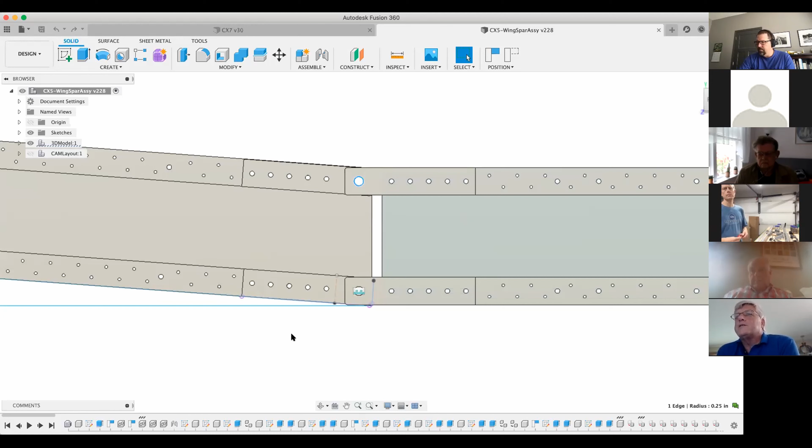So. Well, I think you're okay because you've only got one hole in each cap. You don't have 7 or 8. True. Yeah. I think what you're doing will work. It's just the discussion a few months ago with guys trying to find oversized bolts. Yes. The trick is to buy your bolts, measure your bolts, and then ream the hole to fit the bolt. Right. Yeah. And if worse comes to worse, then buy the oversized bolt.

Mm-hmm. Yep. Exactly. Yeah. Start from a position of way too small of a hole and work your way up to the bolt. So yeah. Anyways. Looks like you did a good job. Yeah, I mean, I've done a few of the CX5 assemblies here.

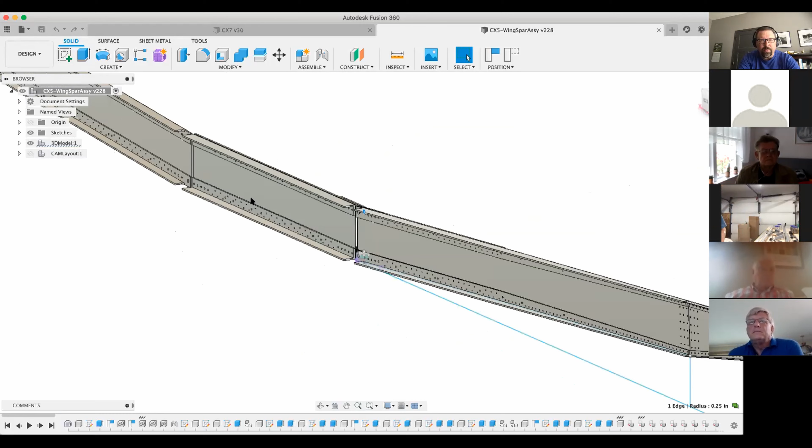So I don't know if anyone ever has a question about how these things go together or different things. One thing I always found very hard to read in the plans was this. If you see the spar web on the wing, it comes down basically flush with these wing attach plates, right? So the spar web and the upper plate, everything, it's all one big chunk of metal there, big chunk of meat that gets bolted through.

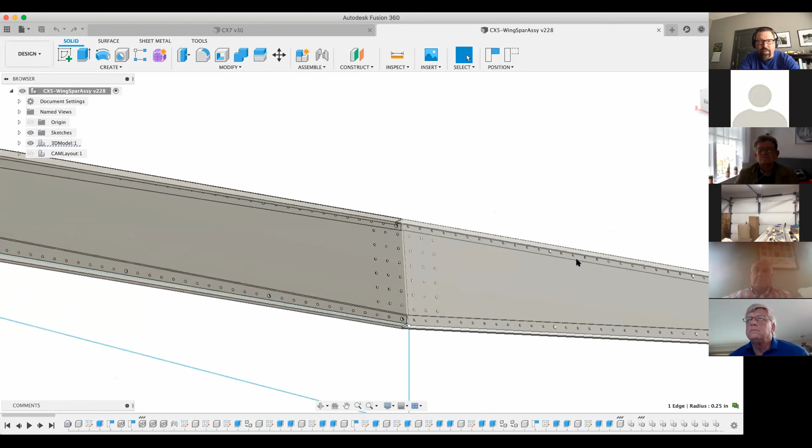So when I was first looking at the plans, it was very hard to see that. So anyways, that's what we got going on there. And again, this is the CX5, so there's one piece spar for the majority of it, and then there's this plate with an upper and lower. There's a splice plate with it, and then the upper and lower reinforcing caps there on that section.

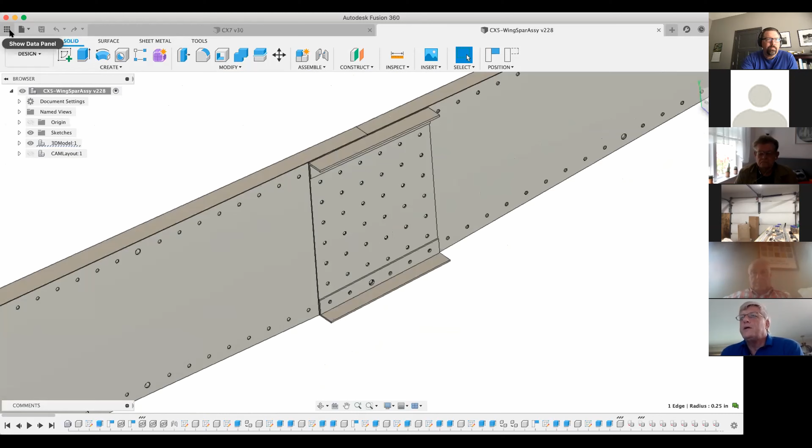I think if you had a book of just a lot of screenshots like that with the splice plate, no dimensions, no nothing, just a screenshot, that would really help a lot of guys out over what's going on in the plan. Yeah. Well, I've been trying to get some of these drawings together on things. I haven't talked to Dave too much about it, because I know there's a concern about publishing too much information and having people be able to build it without plans, without paying the money basically to Dave. But on the other hand, I think if we put out good information, then maybe people won't have such a challenge building it, and it'll be a little bit easier.

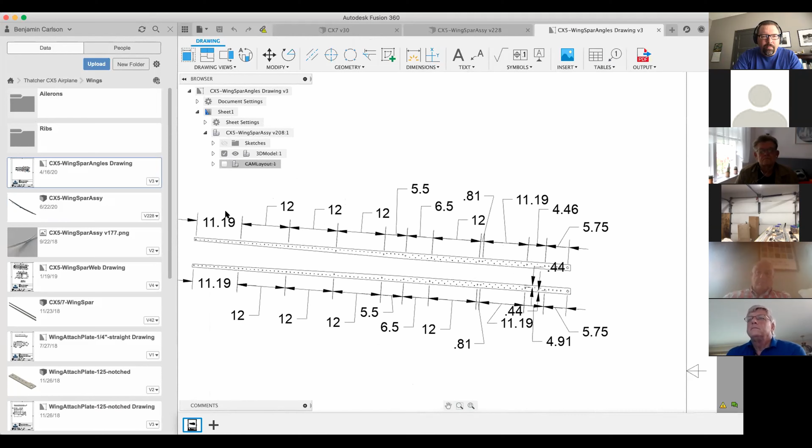This is a confusing drawing, but you can see this is just the dimensions of the major... sorry, I'm trying to zoom in here... the major bolt hole dimensions for the intercostals on the CX5 spars, so you can see some dimensioning things there. Yeah, I've been trying to put together some of this stuff just because in those plans it's showing dimensions not between the centers of the bolt holes, but between the edges of angle aluminum and stuff. And so that's great for somebody who's gonna clamp that intercostal on there and then drill through the intercostal and through the spar web or the spar cap.

But when I'm trying to do it on the CNC machine, I can't do that. I need to know where the bolt hole is in advance, right? And so I think for some people this might be helpful. For others it might not be. But since the rivet holes are all just spaced 1.5 inches and then offset by 3/4 inch, those you place kind of as you see fit. But I figured if you can get those intercostal bolt hole spacings correct, you're going to be in pretty good shape then. Every once in a while I try and spit out some drawings here.

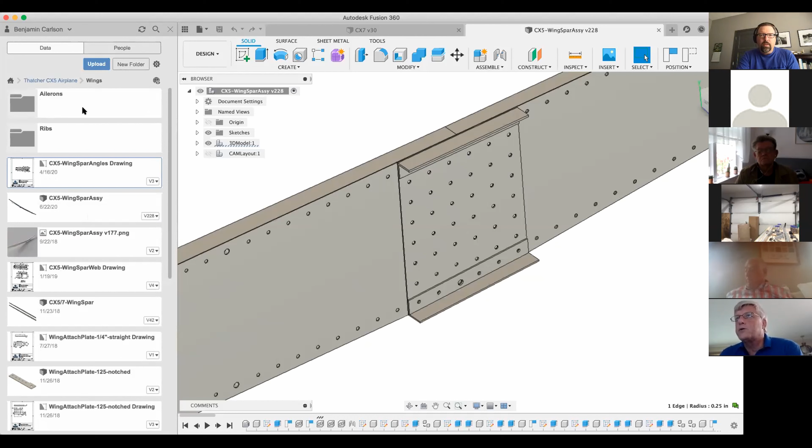Attach plates, notched. Well, I mean, just showing the picture like that, where it shows the relationship between the splice plate and the splice angles. Sure. That simplifies it for people. I'm used to looking at drawings, but for a lot of guys and gals, that would be a big help, just to have a picture like that with no dimension. Okay, yeah, I see what you're saying. It's basically a virtual picture, or you could just take a photo too. I like to see the drawings, because then I have dimensioned drawings. That's fantastic. But it's kind of nice to have the picture like this, or even better the exploded view, where you can see the interrelation of things and sequence of installation and that sort of thing.

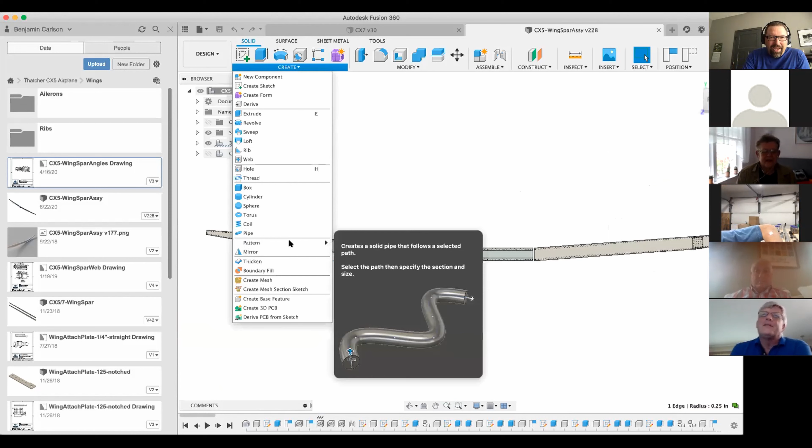I will promise you this though, you will never see me modeling rivets and putting every single rivet in place. I might do some bolts here and there just to make sure there's clearance, but boy, rivets, I don't want to be putting in rivets. So shock and disappointment, Ben. Yeah, exactly. That's why they invented the array command. The array command. Oh, I don't even want to ask. All right. You just draw one, and then you just say, I want 10 high and 20 in a row, and okay, this is all of them. Yeah. So I have the pattern, which is different things like this, but I use that more for creating holes, not for distributing rivets throughout.

Yeah. But anyways, well, cool. I suppose I should probably call this meeting on time here. Yeah, well, I have a lot of stuff waiting for me out in the shop today.